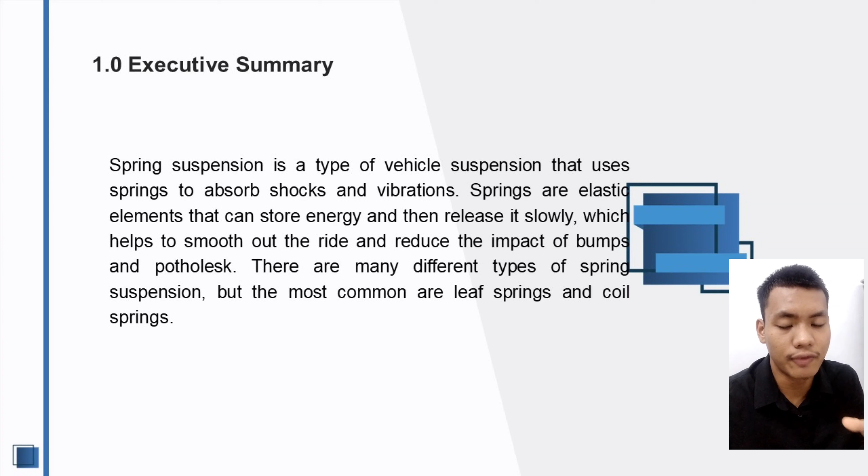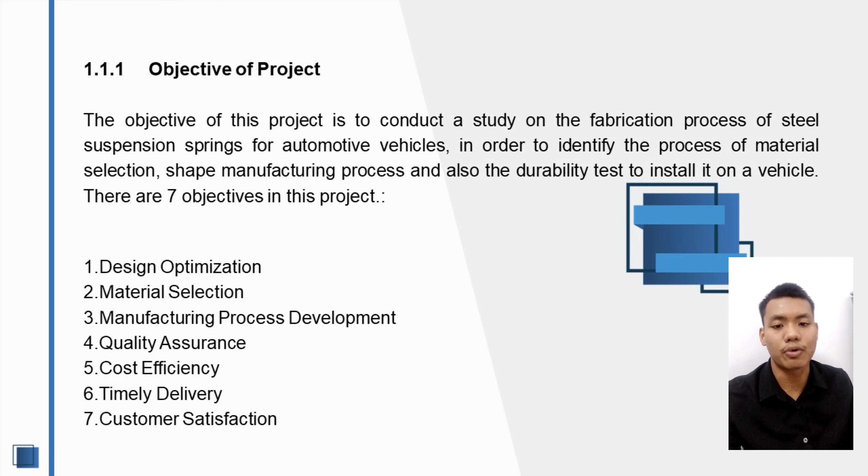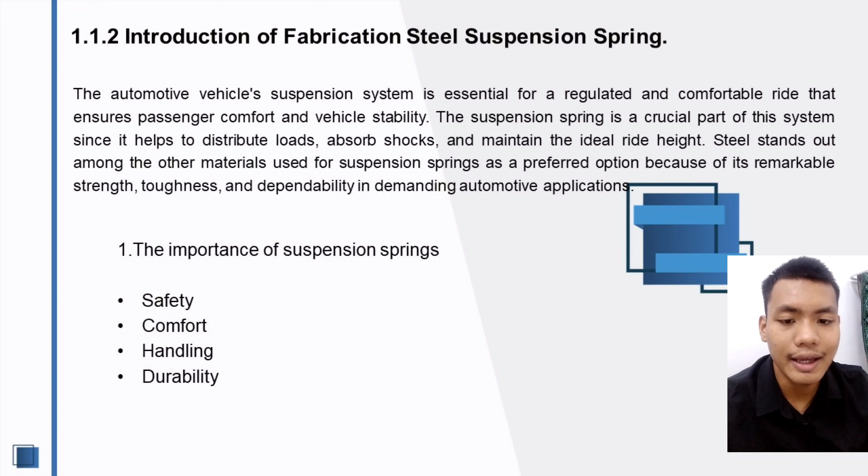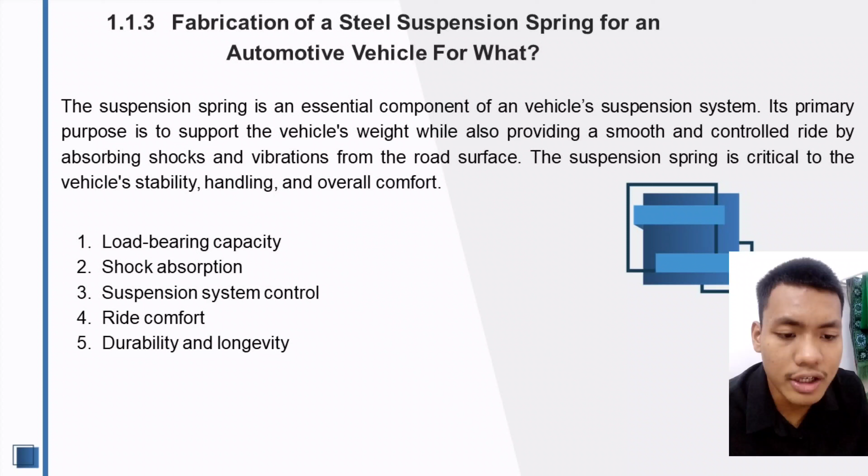Next is fabrication of a steel suspension spring for automotive vehicles, and for what? The suspension spring is an essential component of a vehicle system. Its primary purpose is to support vehicle weight while also providing a smooth and controlled ride by absorbing the shock from the road surface. The suspension spring is critical to vehicle stability, handling, and overall comfort. Number one is load bearing capacity, second is shock absorption, third is suspension system control, fourth is ride comfort, and number 5 is durability.

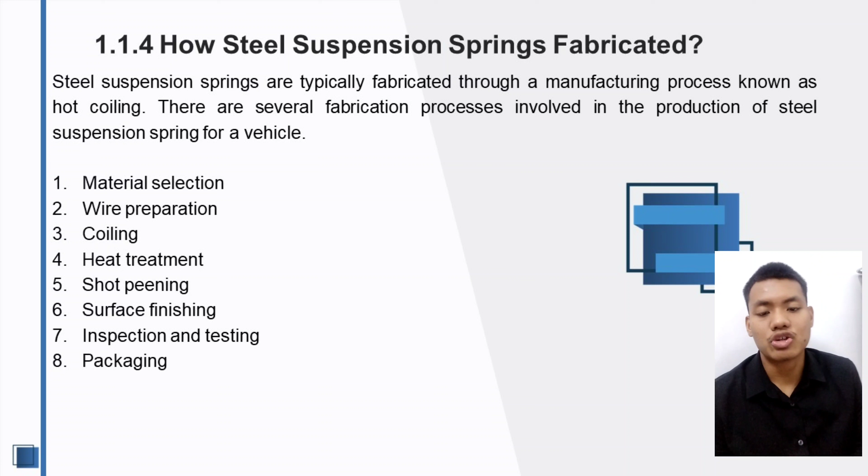How is a steel spring suspension fabricated? Steel suspension springs are typically fabricated through a manufacturing process known as hot coiling. There are several fabrication processes involved in the production of steel suspension for vehicles. Number 1 is material selection. Number 2 is preparation. Number 3 is coiling. Number 4, heat treatment. Number 5, shot peening. Number 6, surface finishing. Number 7, inspection and testing. Number 8 is packaging. So I pass the next slide to my partner in the group.

Thank you, Munir. I will continue my part. 2.0 Fabrication process of steel suspension springs. These are details about the steps to fabricate steel suspension springs. The fabrication process of a suspension spring involves several meticulous steps to create a dependable and long-lasting component suitable for automotive or other applications. The following is a comprehensive description of the typical steps involved in manufacturing a suspension spring.

Our first step is design and material selection. The journey to creating a reliable suspension spring begins with meticulous design and material selection. Engineers carefully design the spring to ensure it meets specific requirements, providing the desired support and flexibility to absorb shocks and vibrations. Additionally, the appropriate material is selected based on factors such as strength, corrosion resistance, and cost. Next slide.

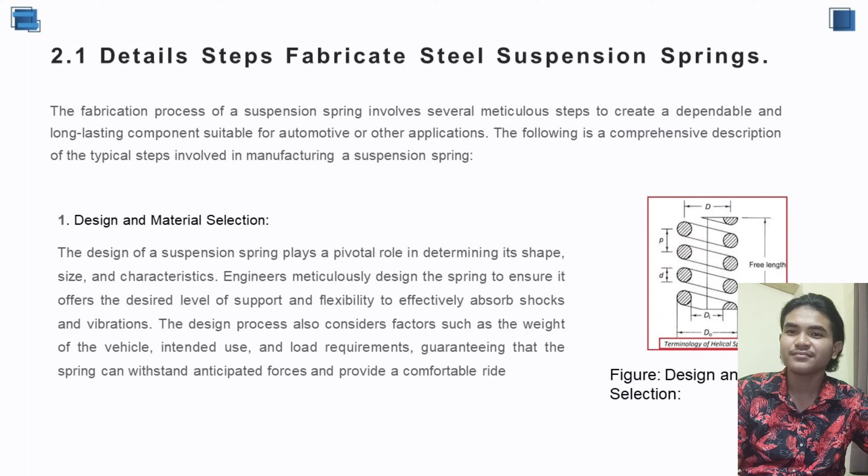The second step is the preparation process. Following the design and material selection, the chosen material undergoes a preparation process. This involves cutting the raw material into suitable lengths and, if necessary, subjecting it to heat treatment or annealing. This prepares the material for subsequent manufacturing steps.

The third step is hot coiling. The prepared material undergoes hot coiling, which involves applying heat to soften it and make it more malleable. The softened material is then coiled around a mandrel or form to create the desired shape and size of the suspension spring.

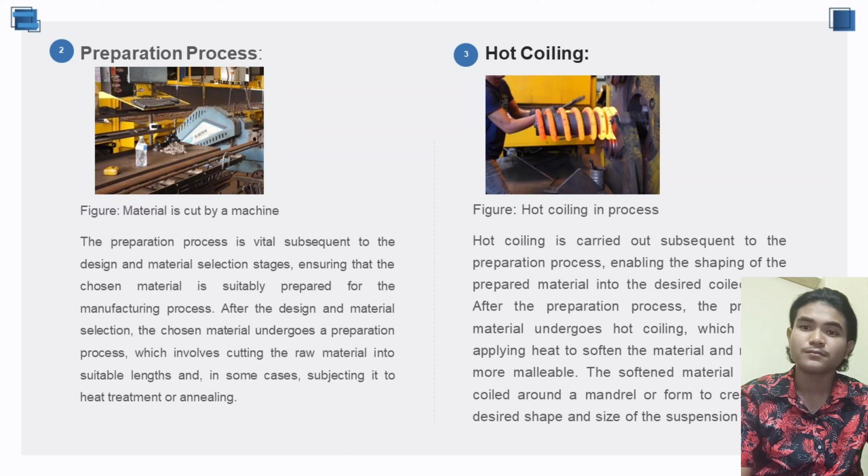The fourth step is quenching and tempering. After coiling, the suspension spring undergoes quenching and tempering. Quenching involves rapidly cooling the spring after heating it to a high temperature. This process hardens the spring, making it stronger and more resistant to deformation. Tempering follows, reducing brittleness and enhancing flexibility.

Fifth step, shot peening. To improve fatigue resistance and durability, the suspension spring undergoes shot peening. This process involves bombarding the surface of the spring with small metal or ceramic particles at high velocity, inducing compressive stress that counteracts tensile stress during use.

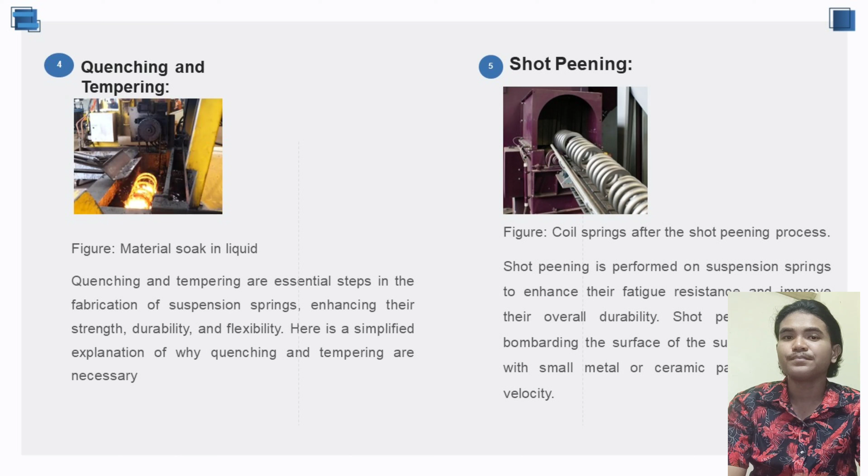The sixth step, grinding and finishing. After heat treatment and shot peening, the suspension spring undergoes grinding and finishing operations. This ensures the springs are flat, parallel, and free from burrs or sharp edges, achieving the final dimension and surface finish.

The seventh step is coating and corrosion protection. To prevent corrosion and enhance durability, the suspension spring undergoes a coating process. Zinc plating, powder coating, or painting are commonly used methods to protect the spring from environmental damage.

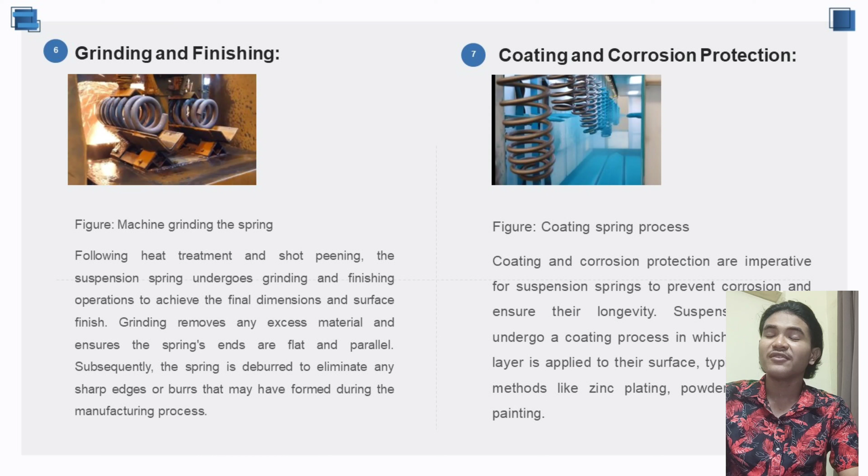The next step is quality control. Throughout the fabrication process, quality control measures are implemented to ensure the suspension springs meet the specific standards and specifications. Inspections and tests are conducted to identify any deviation and ensure the springs are defect-free.

The final step is packaging and shipping. Once the suspension springs pass quality control, they are carefully packaged for transportation. Proper packaging ensures their safe arrival at the assembly line or end user, protecting them from damage during handling and transit.

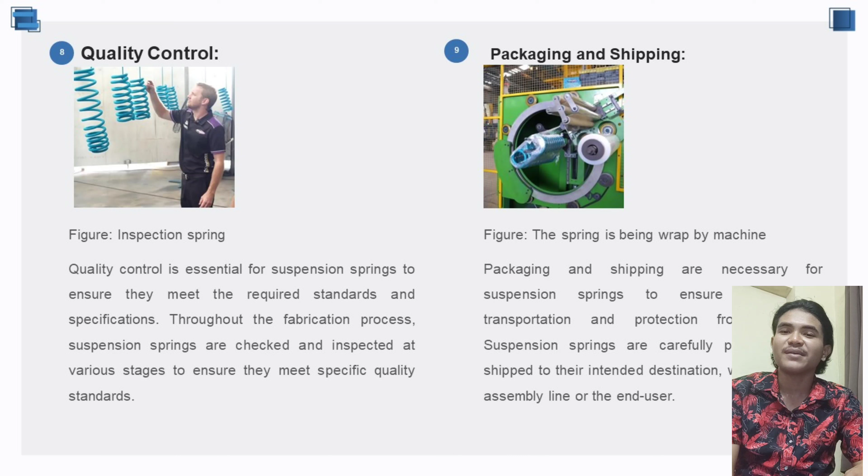Today, I am presenting the flowchart of suspension fabrication. There are 6 steps in the process, starting from design and specification. In this step, the R&D team creates and designs the spring using a 2D sketch first and then 3D sketching using CATIA or SolidWorks. While designing the spring, part of the team will discuss the specification most suitable for the product.

The second is material selection. There are many great materials out there, but we must choose the most suitable one for making the spring, which has strength, durability and more. Chrome silicon steel is chosen for this part. The next part is wire preparation. In making this spring, some measuring and cutting must be done to make sure it meets the requirements. If not, it will result in waste and more.

The last one is the finishing operation. There are 3 critical steps in this operation, which make sure the spring is good or not. Number 1 is shot peening. Shot peening extends the service life of the component by creating an induced compressive stress layer to increase resistance to fatigue, including corrosion, stress corrosion, and cavitation corrosion, while also helping to resist the propagation of cracks.

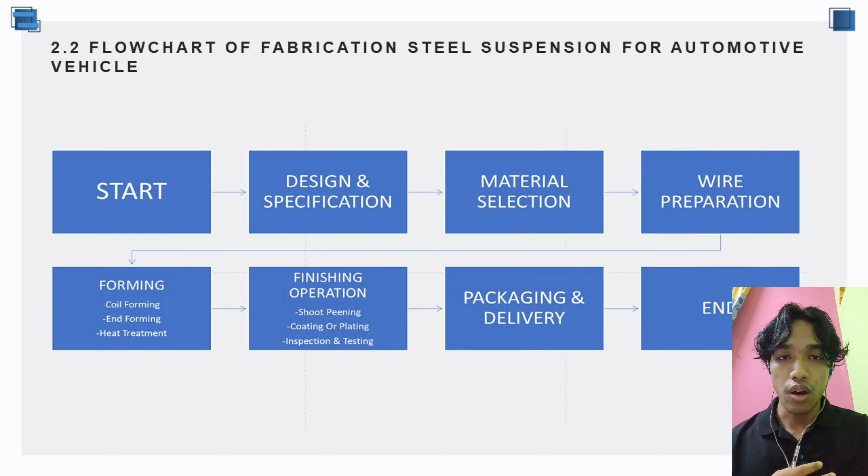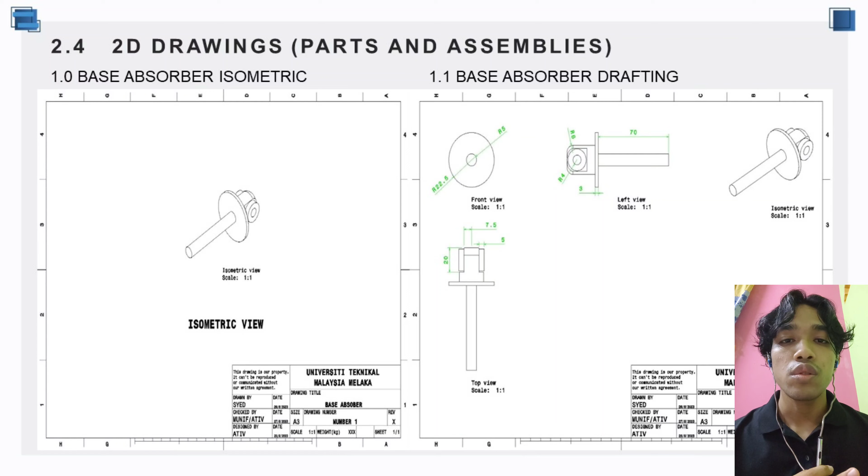This is a 3D sketch we have done in CATIA V5 software, and as you can see, there's also a 2D isometric view of each part. They are assembled with springs. This shows that measurement is important in fabrication for each part, to make sure it will fit when assembled with no error.

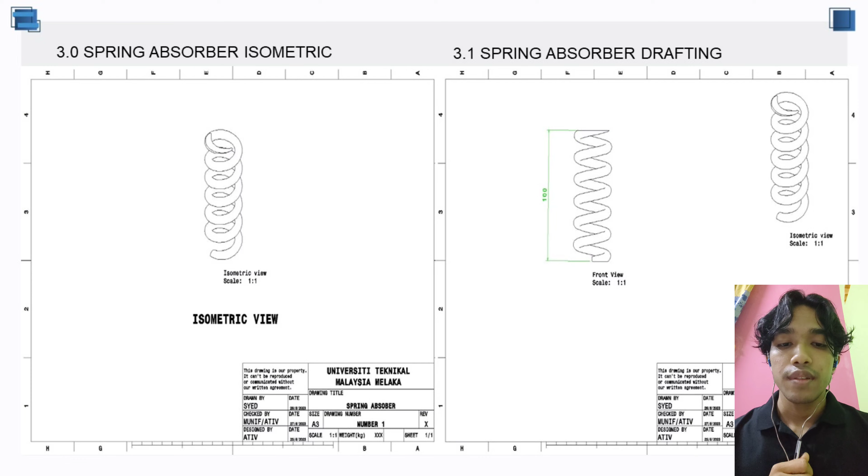In discussion, steel suspension springs are integral components of automotive vehicles, responsible for supporting the vehicle weight, absorbing shock and vibrations, and providing a comfortable ride. The fabrication process of these springs involves several essential tasks aimed at ensuring their function, durability, and strength.

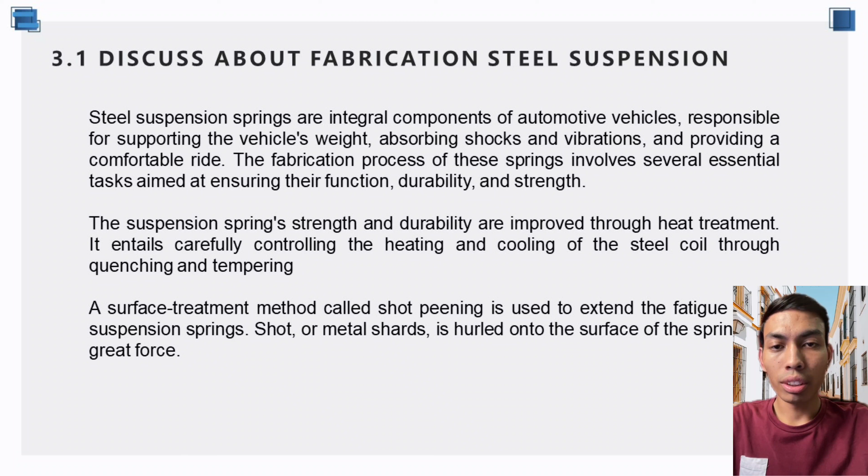Number 2, the suspension spring's strength and durability are improved through heat treatment. It involves carefully controlling the heating and cooling of the steel coil through quenching and tempering. A surface treatment method called shot peening is used to extend the fatigue life of suspension springs. Shots of metal are hurled onto the surface of the spring with great force.

The suspension springs are end ground for maximum performance and durability. This procedure guarantees parallelism and flatness while removing any blemishes or imperfections. Applying a suitable protective coating such as powder coating or electroplating will shield the suspension spring from corrosion and wear. To ensure the production of dependable suspension springs, stringent quality control procedures are applied throughout the fabrication process.

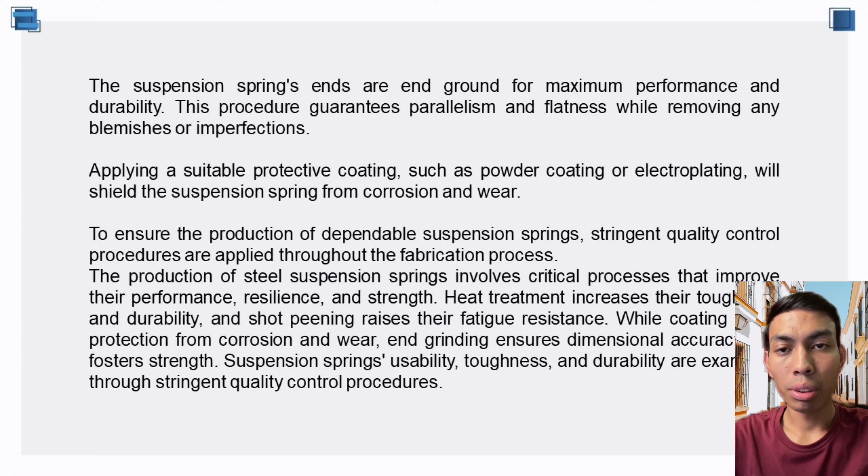The fabrication of steel suspension springs involves critical processes that improve their performance, resilience, and strength. Heat treatment increases their toughness and durability, shot peening raises their fatigue resistance, coating offers protection from corrosion and wear, and grinding ensures dimensional accuracy and strength. Suspension springs' usability and durability are examined through stringent quality control procedures.

For the conclusion, the fabrication of a steel suspension spring for an automotive vehicle is a complex process that requires careful consideration of the spring's load rating, deflection, stiffness, fatigue life, and corrosion resistance. By carefully considering these factors, it is possible to fabricate a spring that meets the specific requirements of an automotive vehicle. Key steps include material selection, spring design, spring manufacturing, and spring testing.